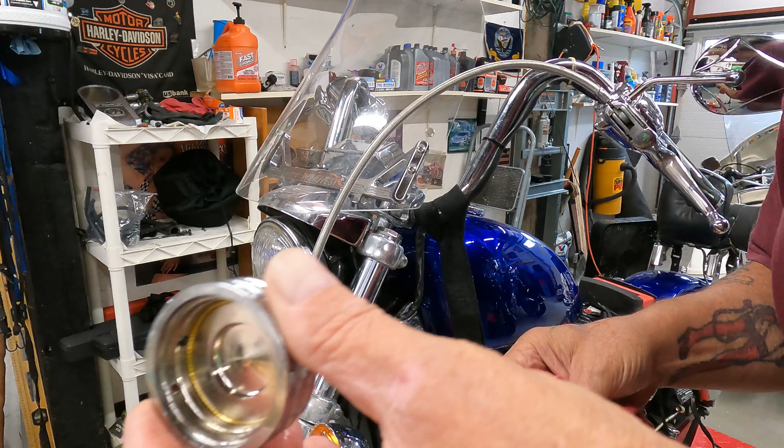Okay, so I already took a couple of these caps off. I've got these caps that are over the nuts for the front forks here. I've got to take another Allen head screw out, and we've got to take the windshield out. Let me take that one out, and then we can get a better look as to what's going on.

All right, so we've got the windshield off, maybe. Did I get it off here? Okay, we'll stick this over here.

I think I'm going to have to take the handlebars off because I don't think I can get a socket in here - I don't have a short socket, I don't think it's going to go in here. Then I've got to put a jack underneath the front because I want to take the pressure off the front end, so that when I take the tension off the springs in the front end. Let me do that - let me see if I can get a socket on here first. I'm going to have to take the handlebars off. Let me put the jack underneath first so I can get rid of these straps.

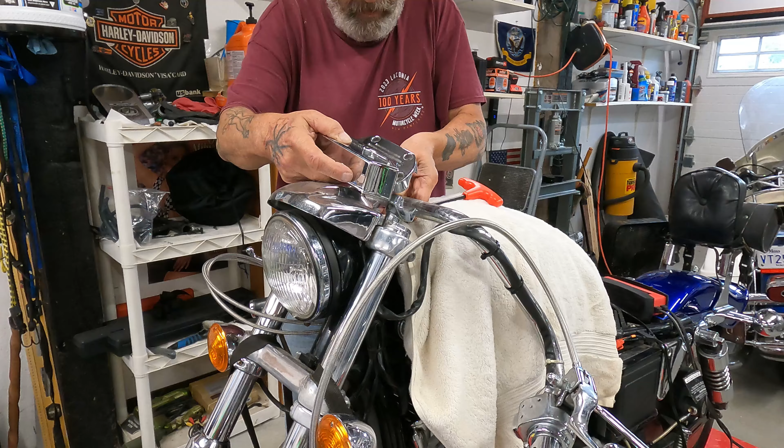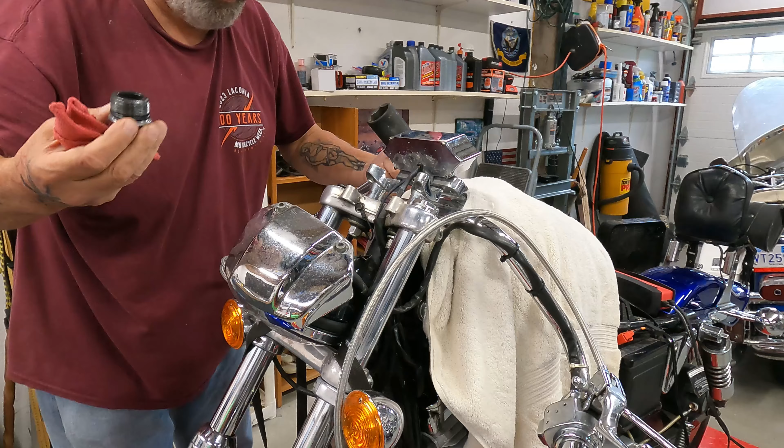All right, so we got this popped up. So the seal looks pretty good on that - I don't think we'll have to deal with the seal. I'll put that over there.

And we're going to take the spring out because it's a little bit easier to clean this off. Let me get something to... So you've got to watch the position of this spring, because as it goes down, the coils will get tighter and tighter as it goes down. So you want to kind of pull it up easy - see how tight the coils are on here, if you can see it.

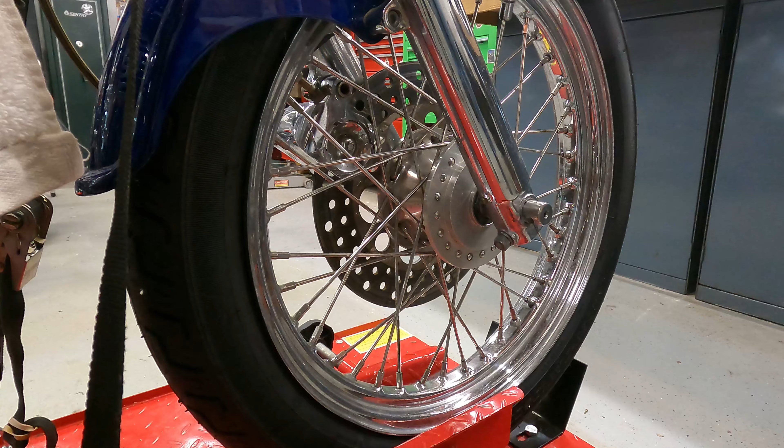All right, so if we go over here, here's the drain plug right here. Now they say there's 10.2 ounces that go in here - I just want to see how much is in there. You can't really go by what comes out, because what if the last person that put that in didn't put 10.2 in, or put 9 or something. Then you take 9 out and go, oh, there's 2 ounces left.

So we're going to check and see what's in there. And you just let that down like that. There's a washer that fell in there - you can see how small this screw is, it's really small. So I'll have to get my magnet and pull that washer out.

So you can pump the front end up and down - I don't know that it makes that big of a difference. Like right now, it's not even coming up to 8 ounces. I'll wait till it drains out pretty good - of course there's maybe half an ounce there, and we could get to the 10 ounce mark. We'll see, so we're at about 8 right now.

I'm going to say there's a half an ounce on the table that I spilled, and it's still kind of coming out, so I can't leave this up here because it's going to fall over if I try to leave that up there. So we're actually coming up - I'm going to say it's past 10 ounces now, closer to almost 11. It's actually coming up to almost 12.

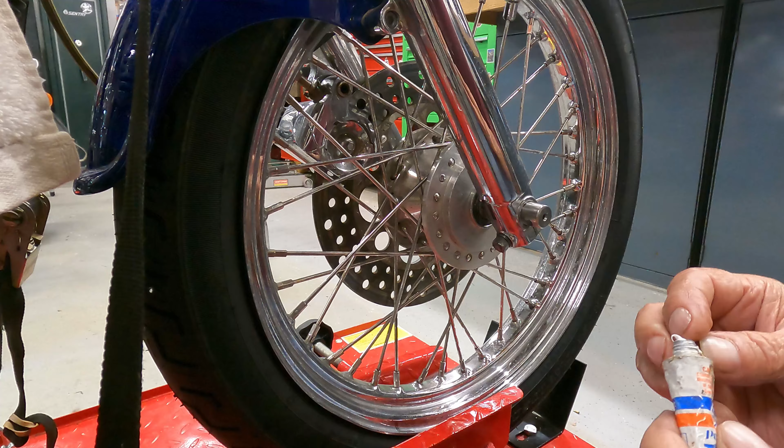Okay, so I found the washer. What I'm going to do is put a little bit of Permatex thread locker on it. This is a really small screw, so we'll just put some of that on it to make sure it's not going to leak.

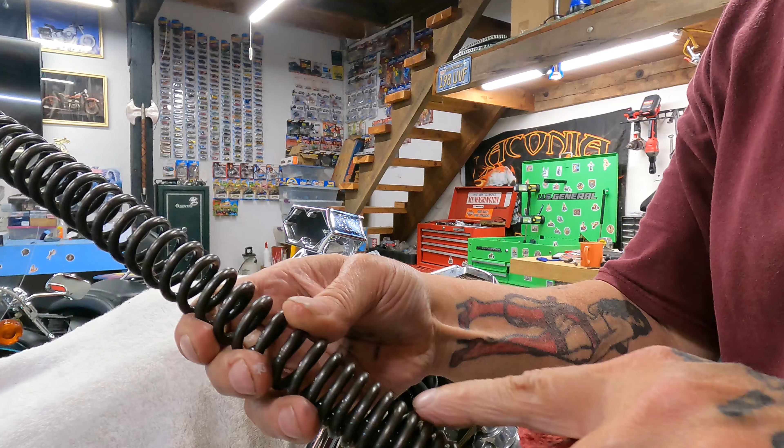All right, let's put the spring back in, then we can put the oil in. Remember, as it gets smaller, the distance between the coils—that goes in like that. So we're not going to have to push down much on that. That's kind of good, I don't know why, but all right, I'm going to check the manual for the amount.

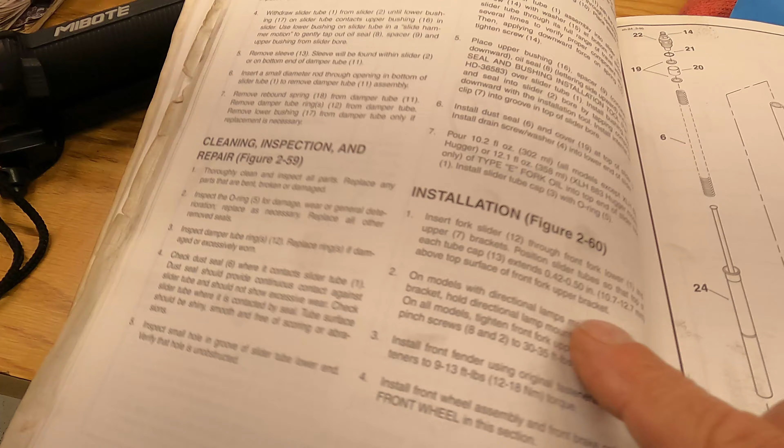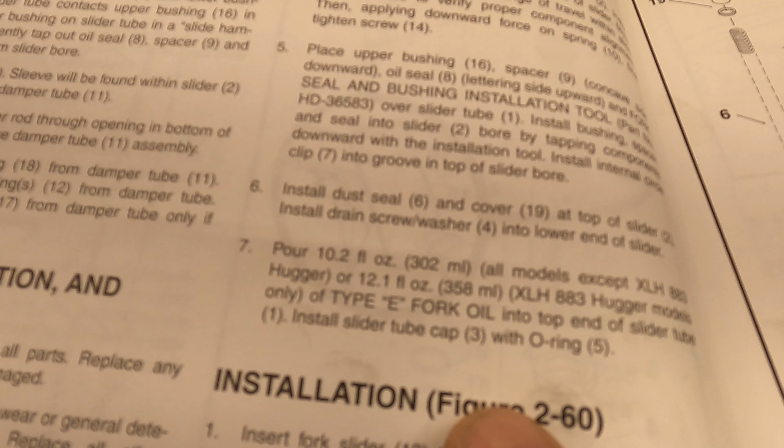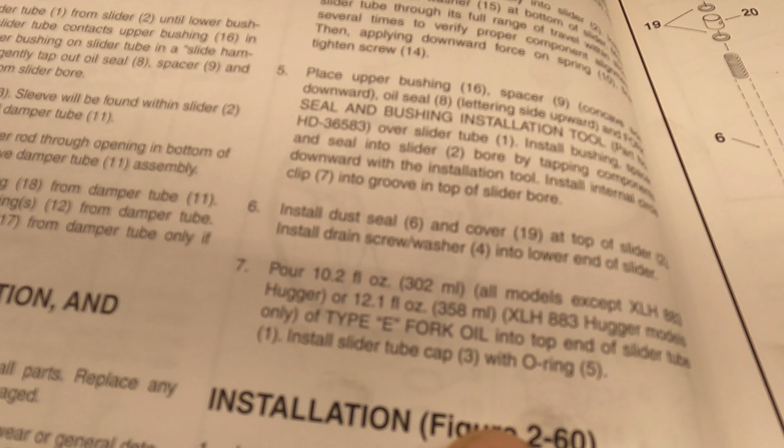I'll be right back. Okay, so if you look at the manual right here, it says pour 10.2 fluid ounces, 302 milliliters, all models except XLH 883 Hugger, or 12.1 fluid ounces, 358 milliliters, XLH Hugger 883 Hugger models only. So this looks like it had 12.1.

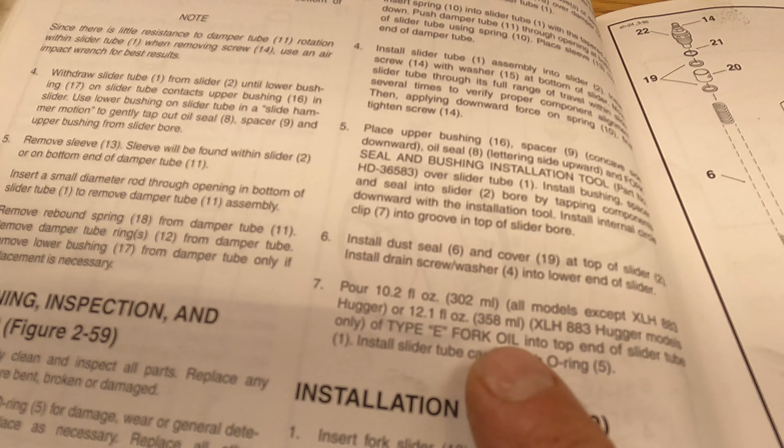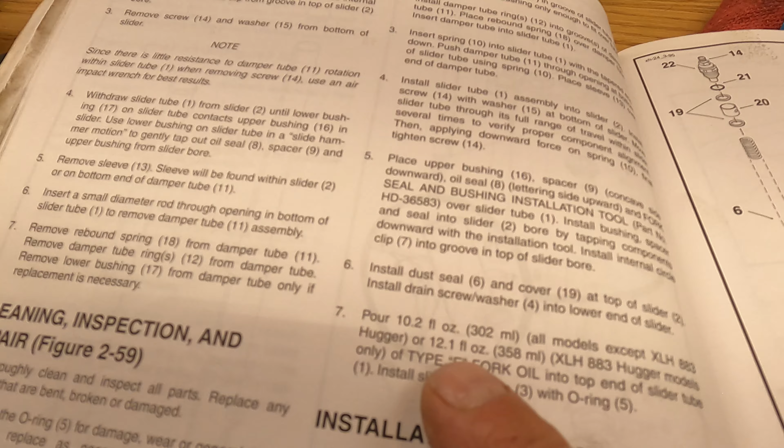I'm not sure why, I don't remember. Again, the last time this was changed was probably 20 years ago. So it should have 10.2, but I think there's probably a reason why there's 12.1. Maybe there's shorter springs in there, maybe it's a different front end. I don't remember what I did to the front end. That's the downside of doing something two decades ago.

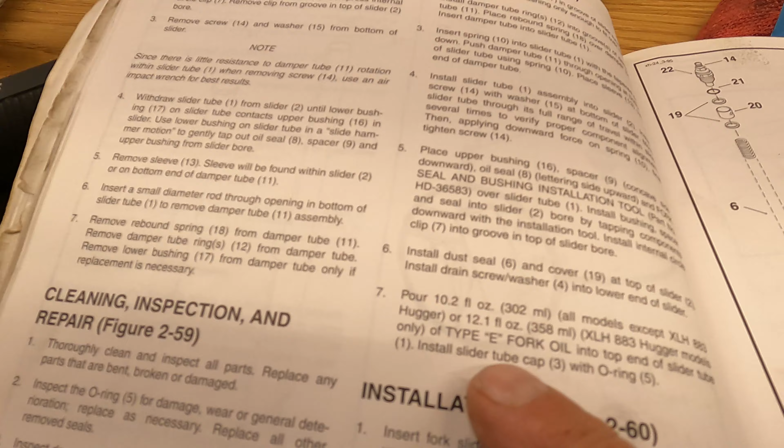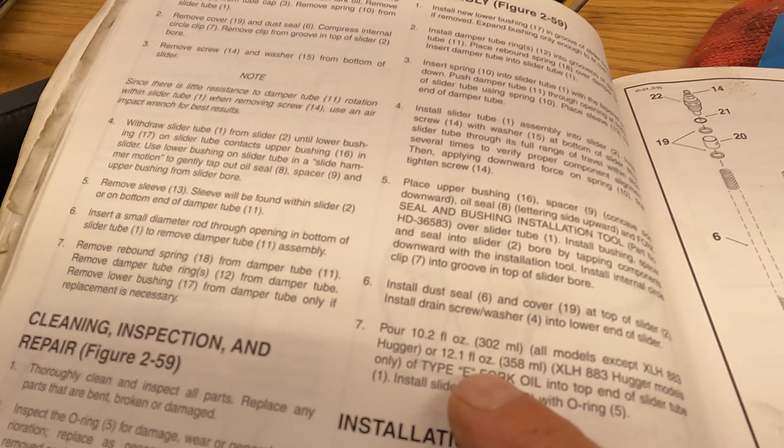So what I'm going to do is drain the left side forks and see how much oil's in that. And if that's 12.1, then I'm going to put 12.1 back in both, because it ran fine. It's had 12.1 in it for, like I said, two decades and it's run fine. So let's drain the oil on the left side.

Okay, so here's something interesting. I went up to my parts stash upstairs and found two sets of lowers. I had a 2000 Ultra and changed the lowers on that to chrome, and it looks like that's what this is, because if you look at the part number, it's for touring. So that's off the Ultra I had, and it looks like these are the ones off the Sportster that I replaced. I'd have to verify the part number, but it does say 97 on there, and this is a 98. If you look at that, it matches up pretty well.

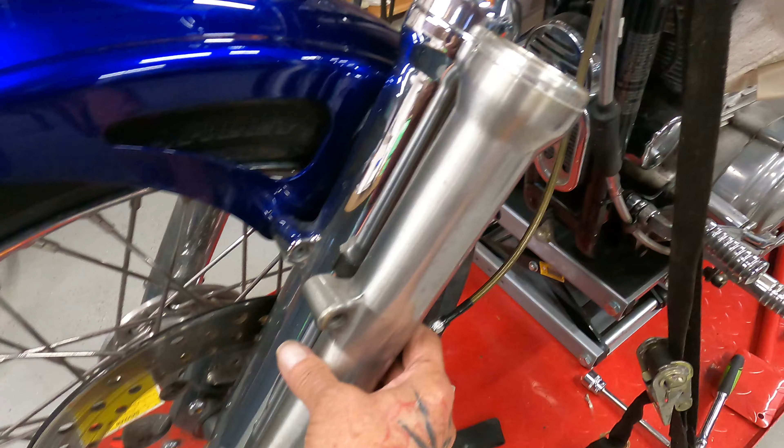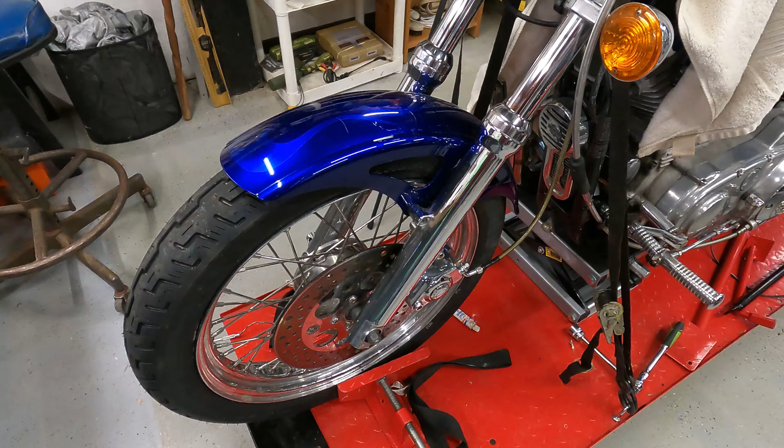So I don't know why there's 12.1 ounces in there—I really don't know why there's that extra 2 ounces of oil. So I'm going to put 10.2 in there like it calls for. I'm going to check this left side first before I put anything in, and then we'll see—if there's 10.2 in this and 12 in the other, then it was filled wrong or something. I'm not sure, I don't know why there was 12 put in the right side.

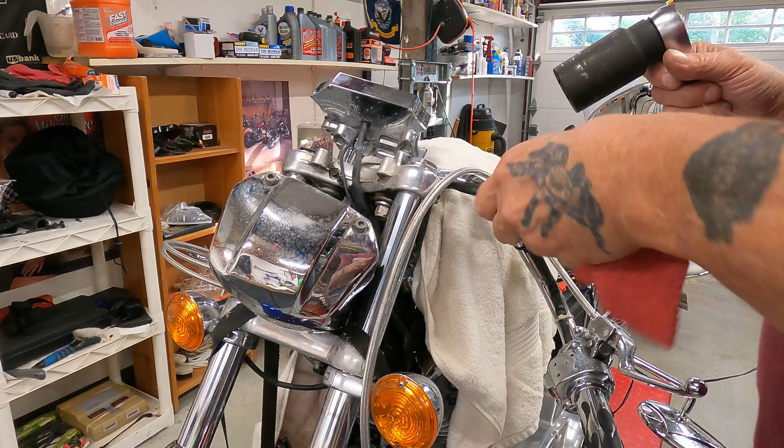Okay, so it's time to take this side off now. So I did get it loose. Should come off pretty easy.

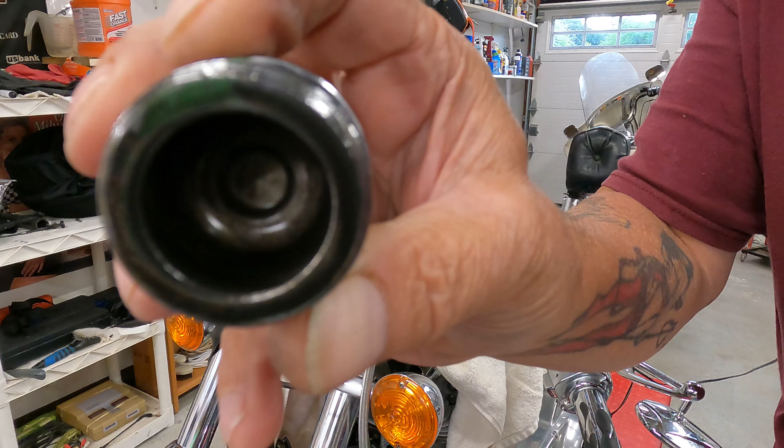So I wonder why, I wonder if these springs were changed. I don't remember if I changed them, but you can see the gasket, the O-ring on that is pretty good. We'll clean that out. But this fork oil really smells bad, so it's been in here a while.

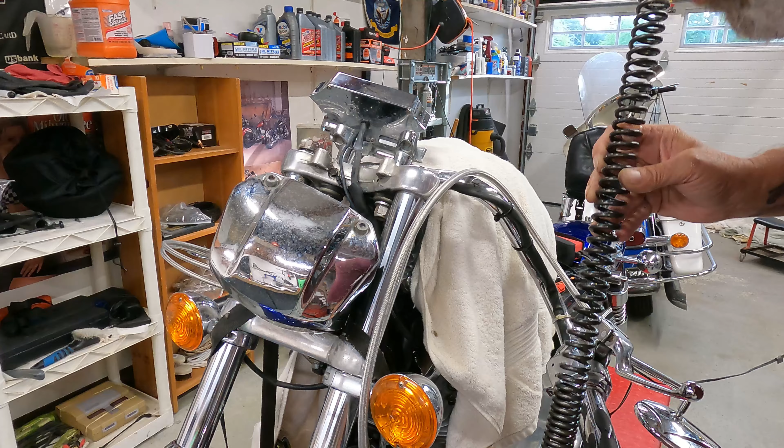So I'm wondering if these springs were changed to a shorter type spring. I don't remember if I did, but I don't think I did. So stick that in there for now. Okay, so now we can set this up and check this level.

Okay, so we're coming up on 8 ounces so far. Doesn't seem to do much when I press down on the forks, like it's not forcing any more out. It's just going to flow the way it is, I guess.

Okay, so we're coming up on about 11 ounces right now. So it looks like the same amount is on each side. Now I know when these lower forks, the lower ends of the forks were put in, you put 12.1 in because they're dry. There's nothing in them, but there shouldn't have been 12.1 come out of it. There should be like 2 ounces that stay in there.

So I don't know, I'm probably just going to put 12.1 back in it. That's what was in it, that's what's coming out, and it seems to have been fine. The bike rode fine, the front end wasn't really that stiff. When you put more fork oil in than it's supposed to be, it makes a stiffer ride. It can actually block the front end from traveling up and down. But it never had that problem. And if we do have that problem, we can always open it up and take a couple ounces out on each side if it looks like that.

So it's coming right up on 12 ounces now. I don't know how well you can see that down here, but there's the 12 ounce mark. It's right at 12 ounces now, and it looks like it's just getting ready to run out. But we'll let it go for a few more minutes.

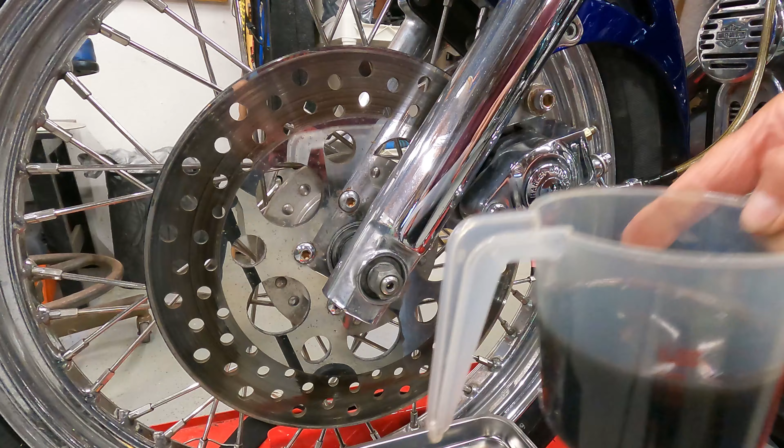Okay, so I think we're just about stopped. It almost looks like there's 14 ounces in there. I'll put the camera up closer. Right now I want to get the plug back in, so we're going to put some more Teflon thread sealer on here. So let's put this up on the bench and we'll get a good look at it.

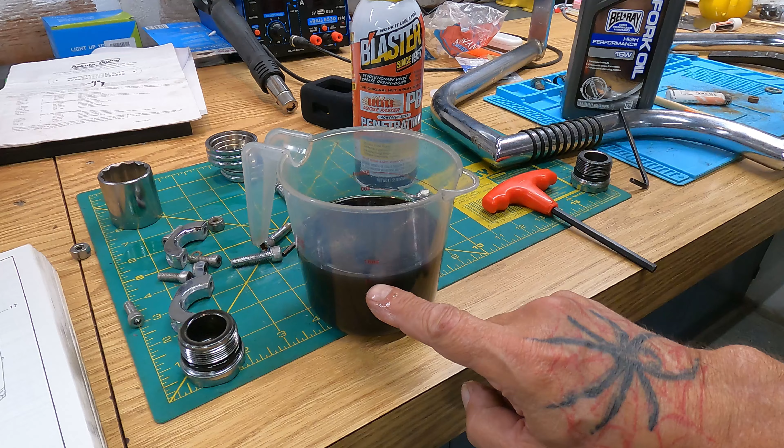Okay, so I don't know if you can tell, but the top line is 16. This line right here is 12, so it's almost 13 ounces that are in there. I don't know why there's so much in there, but I'm only going to put 10.1 in, that's what the book calls for. I mean, I could put 12, and if there's a problem, it's easier to drain it out than it is to take the top off again and take everything off to add it. But I think I am going to put 10.1 back in.

So let's put the spring back in right now, and then we can fill both sides up. Remember, the more compressed the coils are, that goes towards the bottom. And this thing, if it stretches out so much, you can replace the springs in there. Okay, so we got 302 milliliters in here, which is 10.1 ounces. Put another 302 in the other side.

So I don't know if it's type E. It doesn't say it's type E on the bottle, but it said it's all for standard forks and cartridge forks. So I didn't know it was green though, I thought it was a different color.

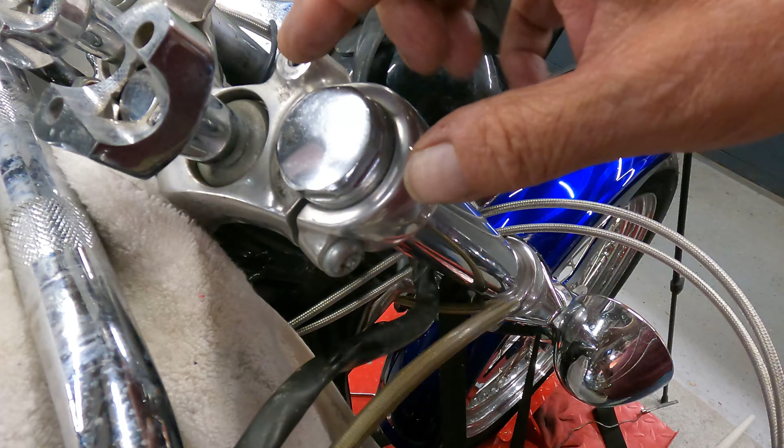Click. Okay, so that's it for this video. Pretty easy to do fork oil change. Now they do make a new cap on here, that's a 2-piece cap, and I think I might get that. It screws in, but then the center unscrews, so you don't have to take the spring out. You just take the top off to let air go through, take the bottom screw out to drain it without having to mess with the spring at all. So I think I'm probably going to get that. I'll look for it for both the Deluxe and the Sportster.

I don't know if they're going to make one of those for the shovel, but front end's coming apart anyway this fall anyway.